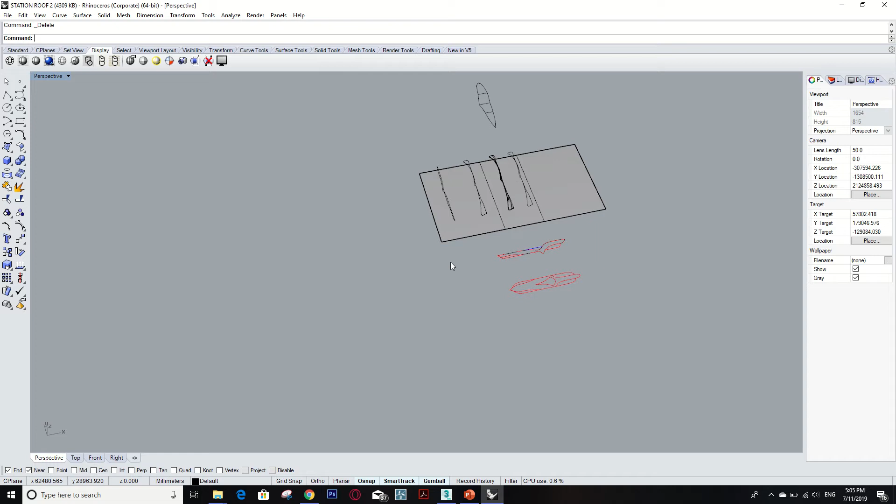Using Rhino to create an organic shape. So first, I have some of my stuff here. So the red line here indicates the shape that I have done on the sketches.

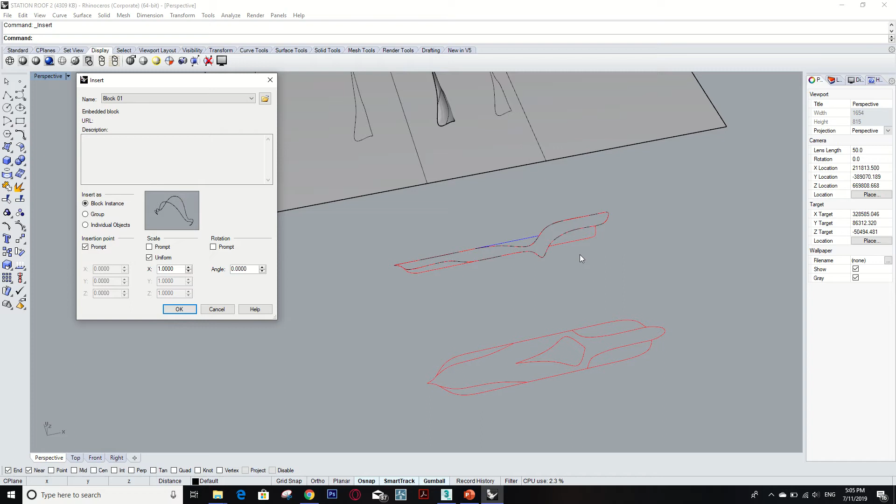So simply you just go to Insert, File, and then Insert, and then just select the photo that you want to put in. Click on the files and then put the photo in, the photo of your sketch of course, and then you can start tracing the line.

So in order to trace this curved line, suppose this is the sketch, so you have to go with the command, just type INTE or something, so it pops up here. I think it's the shortcut for InterpCrv.

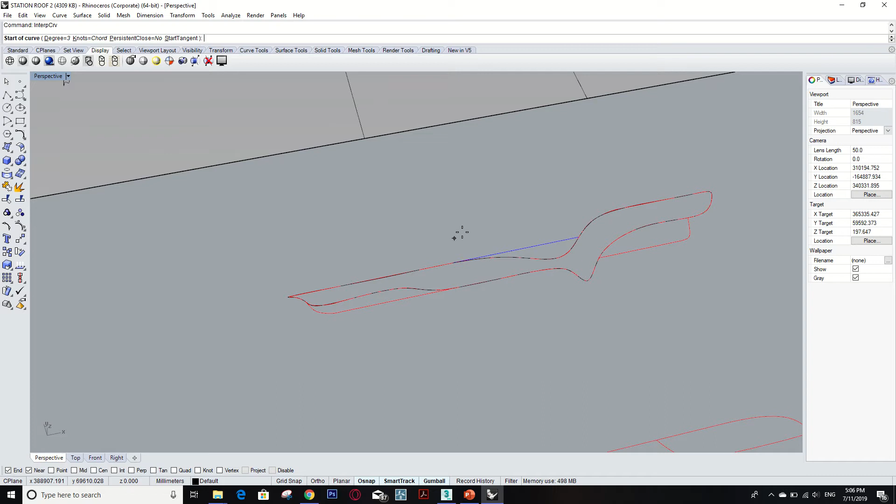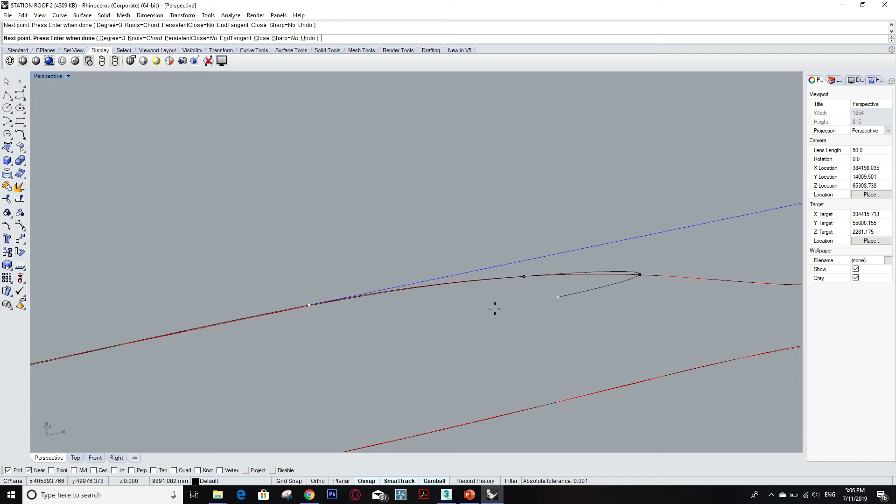So when you have the image right there, make sure that there's a snap nearest here, so you can just click on anywhere that you want. So when you start tracing, for example, this point is here and then it is here.

You just click on any point that you want according to your shape, because it's going to curve following your shape. But make sure that you don't click too close to one another, because there will be too many vertices. Vertex refers to the white point right there, like the dot. So it's going to look like this.

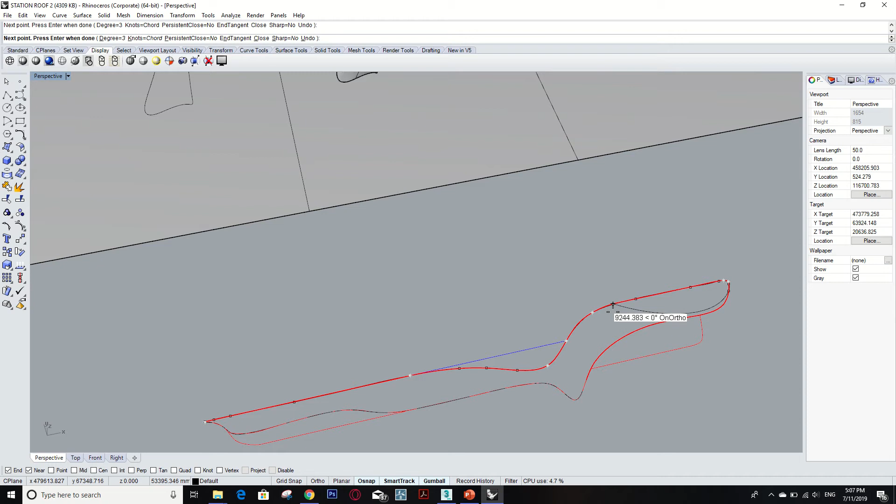Something like that. Since I already have the shape, I'm not going to redo it, but just show you how to join it. Just find the word Join, click on it, and then enter. So that is your shape.

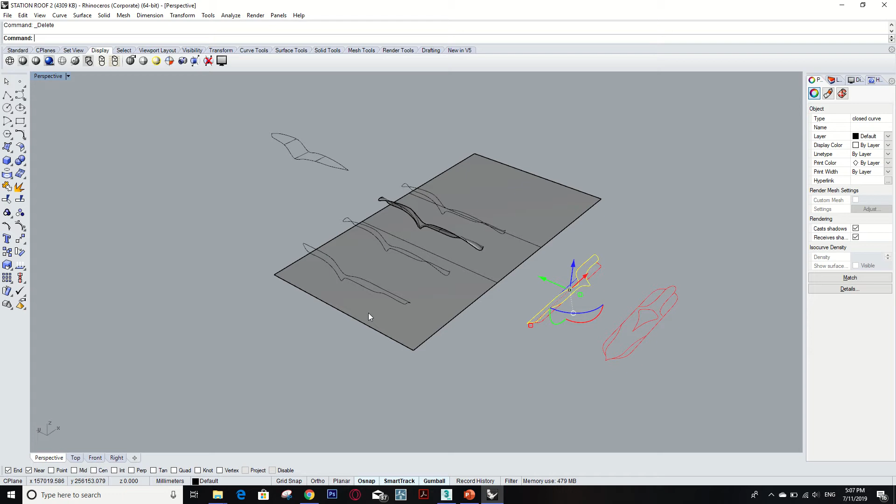So after I have drawn it, it becomes a curve. The selected lines become a curve. So I have moved it vertically, just right here. In order to move it, it's very easy, you can just follow this line. See, you can move it up 90 degrees or something like that. So I already have it just right here.

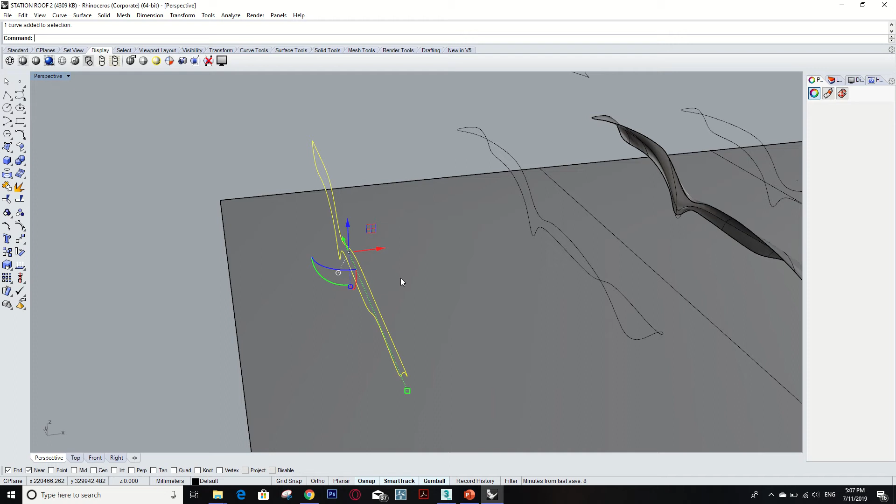But it doesn't have the face yet. So now what we're going to do is create the face following that line. Oh, sorry, before that, this is just a flat one. So what we want to do is make a 3D line like this, as you can see, it's not flat, it has a form like in the real shape.

So in order to do that, you have to select the line, the curve that you have done, and then the command is Edit Point On. It's right there, EDITPTON, edit point on, and then just enter, and you will see the vertices popping up.

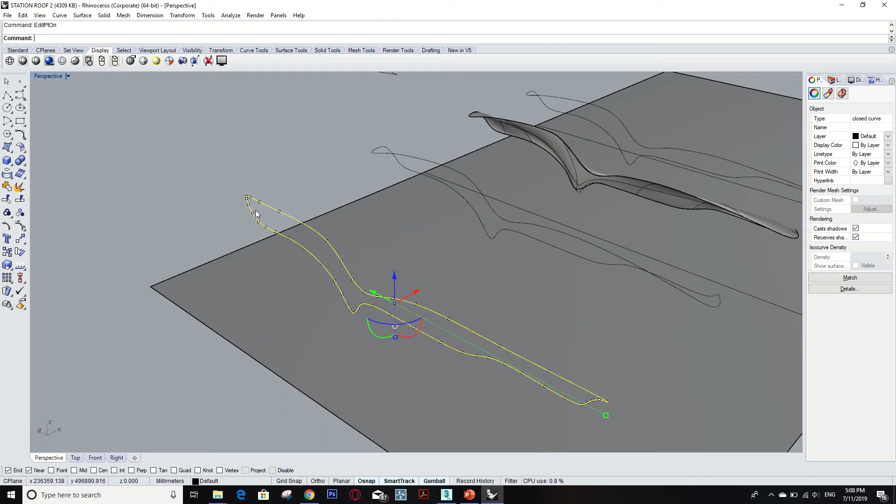So what I simply do is click on each vertex and then move it. Make sure that you move according to axis, like the red axis or the blue axis. You cannot just click on the vertex and move it freely, because it's going to mess up your model. See? It's going to mess up everything.

So what I actually do is move it like this, and then I start moving another point a little bit more, another one a little bit more, until you create the shape that you really want, like the curved one.

So here you can also type the dimension that you want to move. When you hold it, you can see the X, Y, Z statistics here changing according to your move. So it's quite accurate if you know exactly to which point you want to move them.

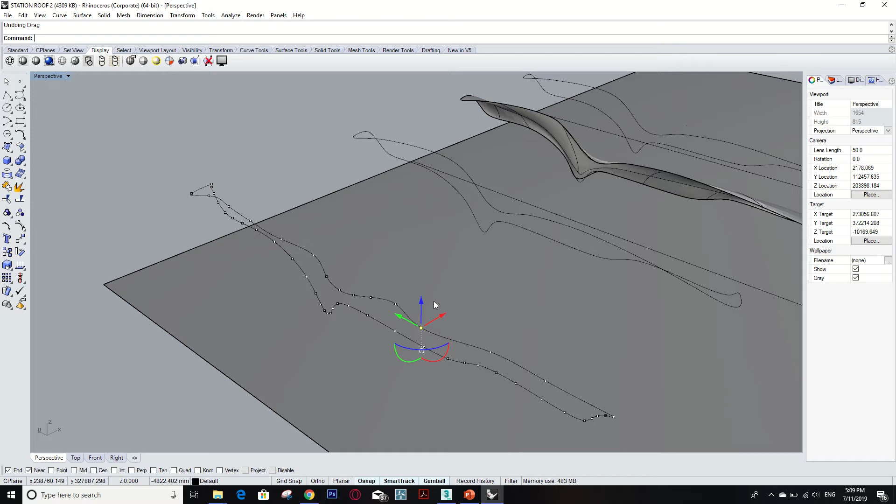So I'm not going to move all of this one by one again, sorry. Just follow what I told you, then you will end up with a shape like this. See, like it. Yeah, so I already have the shape.

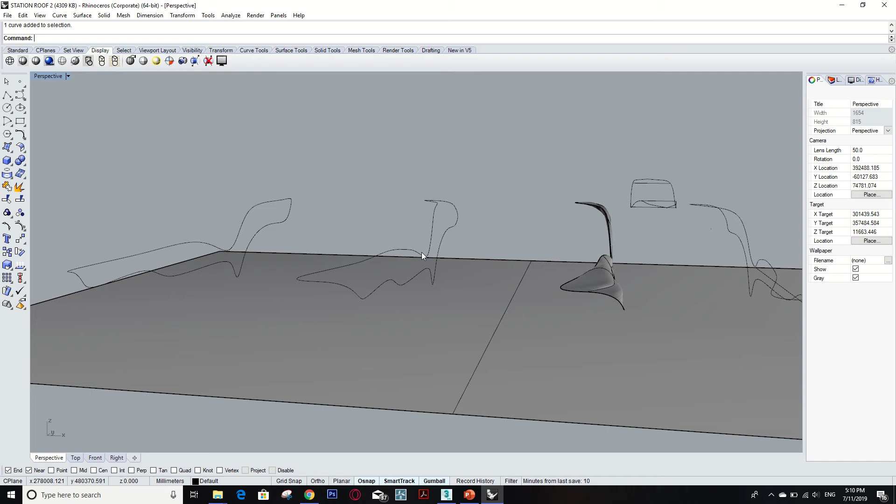So if you click on this one, you can see that the curve is a closed curve, like it's only one object. But if you see this one, it's different lines, separated. Why do we have to separate it?

I'm going to apply the network surface command to create a face like this. But in order to use the network surface, you have to make sure that you have 4 different separate lines. So this is 1, 2, 3, 4.

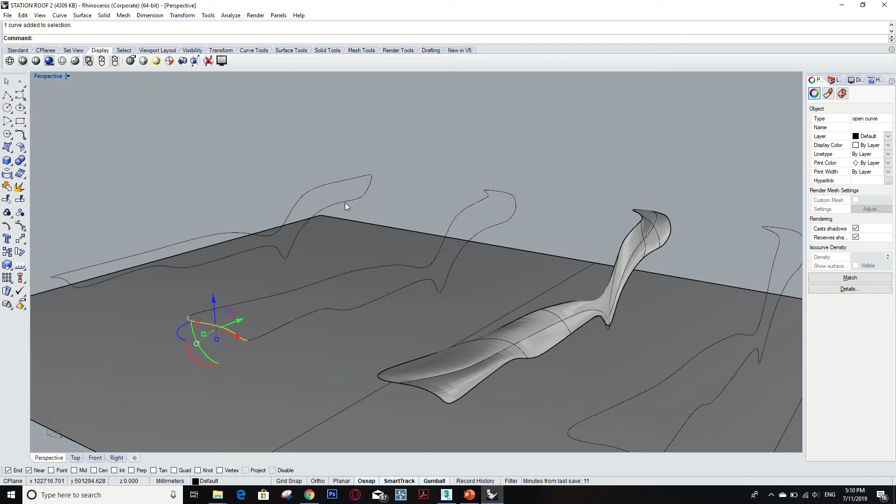You can simply use the command InterpCrv and then draw another line to intersect with it. That's 1, that's 2, that's 3, and that's 4. Then simply use command trim.

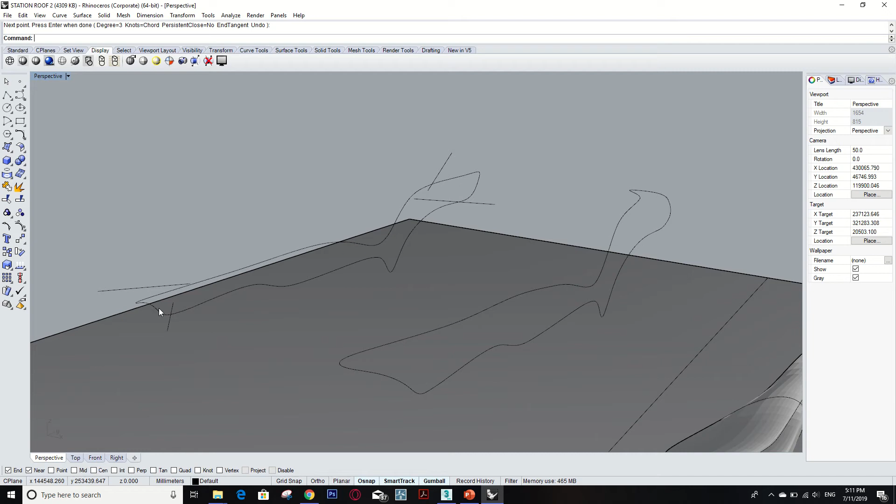But before that, you have to copy the line curve that you've done, too many lines, because after you trim, the area that you trim will lose the line. For example, I'll type in the command trim, select on these 2 reference lines, and then enter.

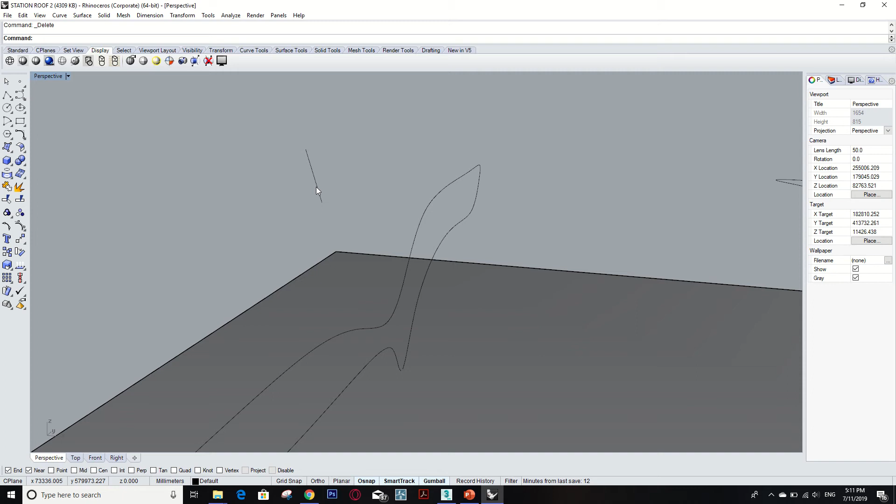I forget that it needs to be snapped on the object. So I'm going to trim it again. Enter, select the reference lines, and then click on that. See, so it's gonna be gone.

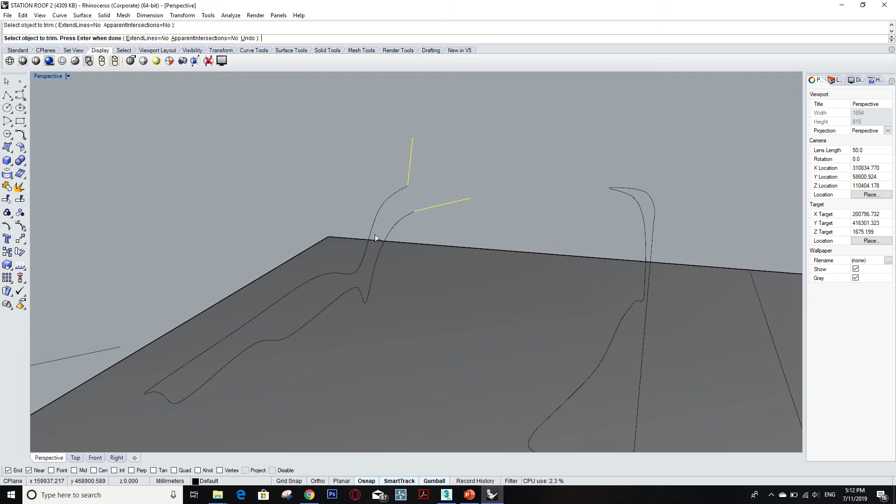So make sure that if you want that line back, you have to copy the model first before you trim. Of course I'm not going to repeat the way I did it from the beginning. So here I already have the different trim lines, 4 of them. You have to make sure you trim it in the direction I tell you, like this one.

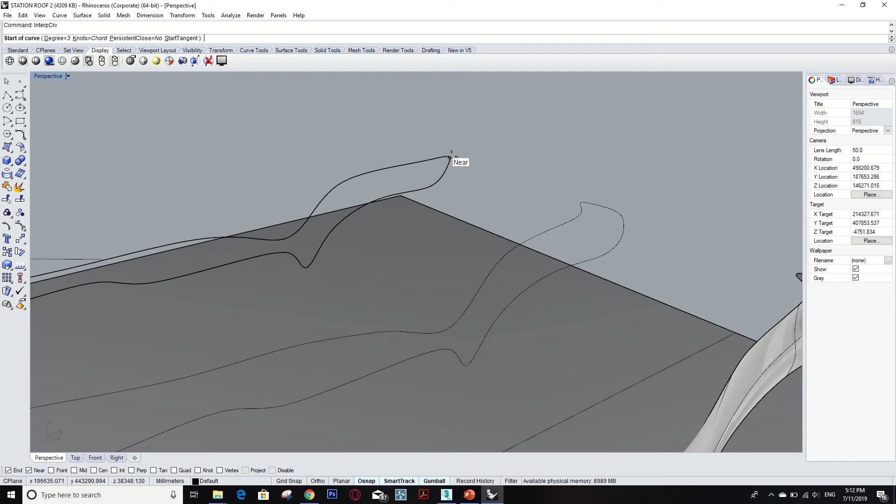I'm just going to draw it again here, and then here, and here. Because you need the line that has been trimmed in a parallel way.

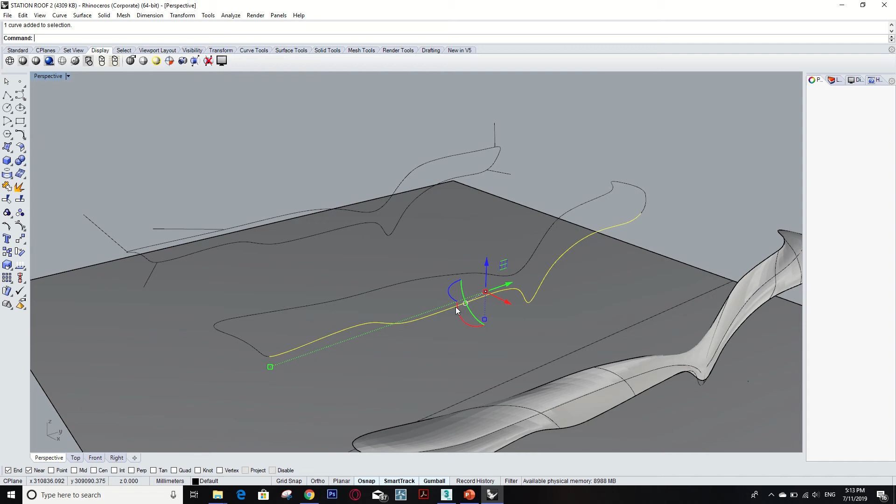For example, this line should be facing this line, and then this lower line, the whole line here, has to be facing up here, like this one. So you can see that this line is facing this line, and this line is facing another line here.

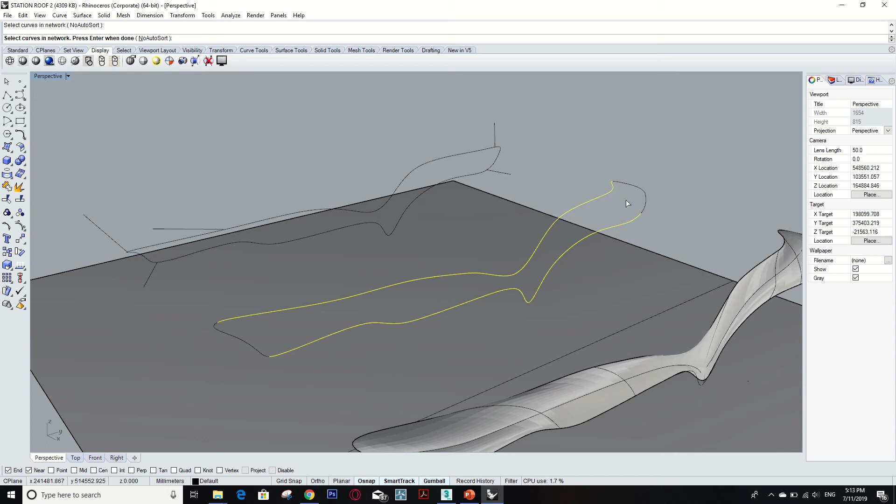Okay, so now we're going to apply network surface. You can just type network surface, it pops up here. Then you have to select the line by holding shift, click another line, and then the line there, and then enter.

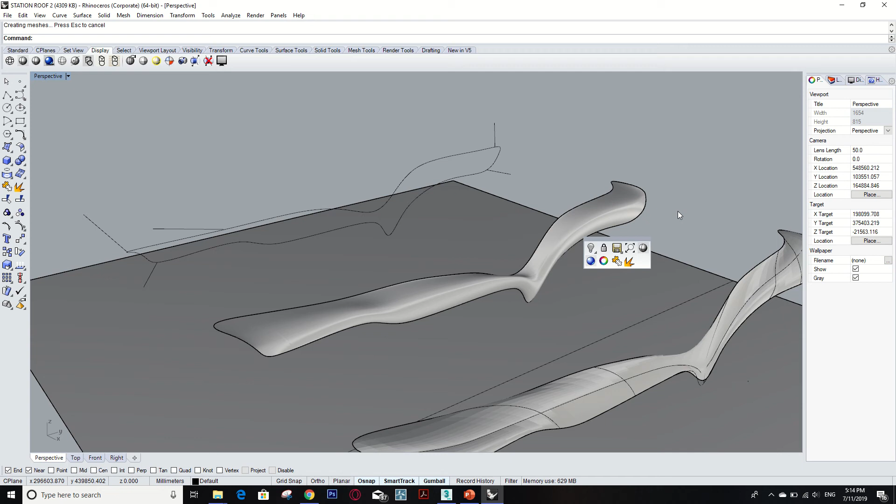So you can see it shows the lines that have to be joined to create the face. Simply click OK and wait for the operation to get done. See, so it's just right there. This is the face that we've created in organic form.

And of course, if you just wanted another side of the form, because this is the shape of my building and it's symmetrical, just use command mirror and then click on that and enter. That's it, it's very easy.

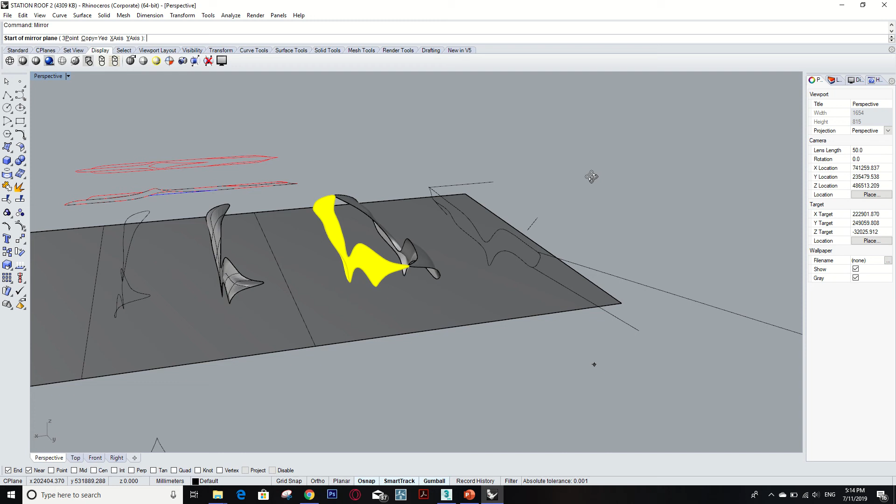I used this in my design research project because I had done it before I learned 3ds Max. So yeah, it's very simple.

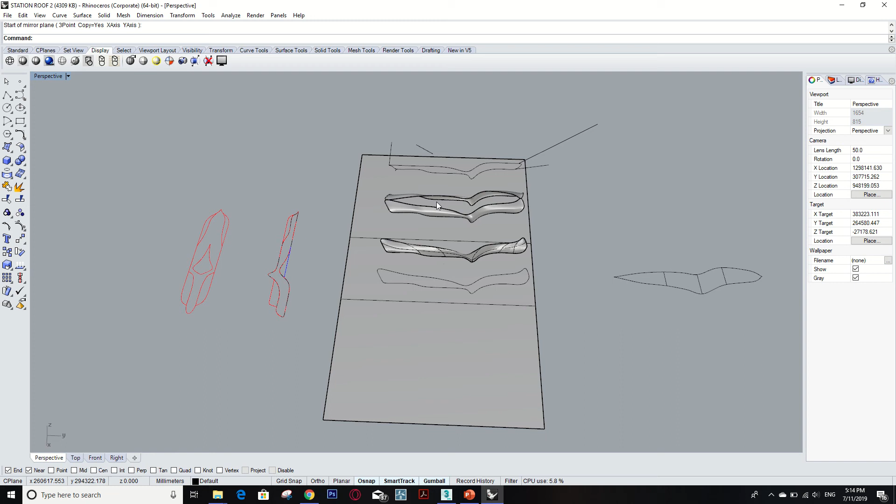Similarly, when I want to create another glass panel covering the roof here, it's exactly here. Last time I used the other method, which is you can just use InterpCrv and then trace the line from there. See, that's how it works.

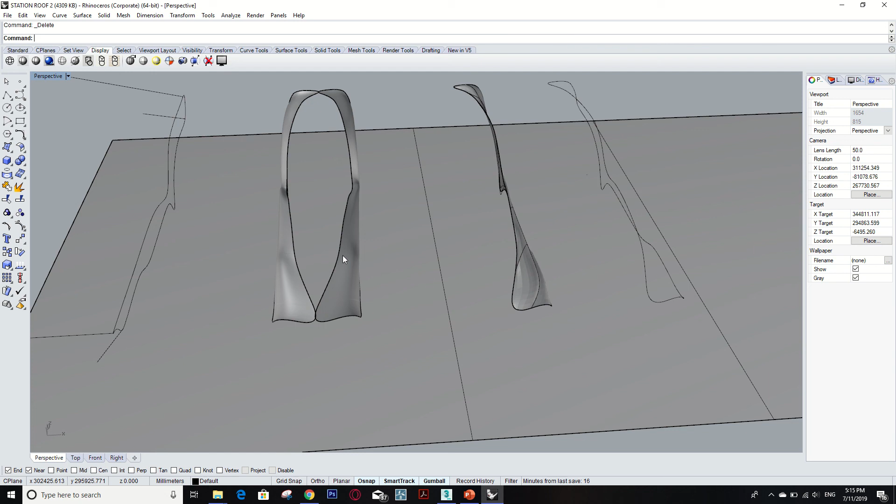But another way is you can simply use command project. When you project it, it's going to be flat on the surface. Let me try that, okay so I'll just remove that. Project. Oh sorry, I have to click on that and then project. Oh, it's not working with the surface, sorry.

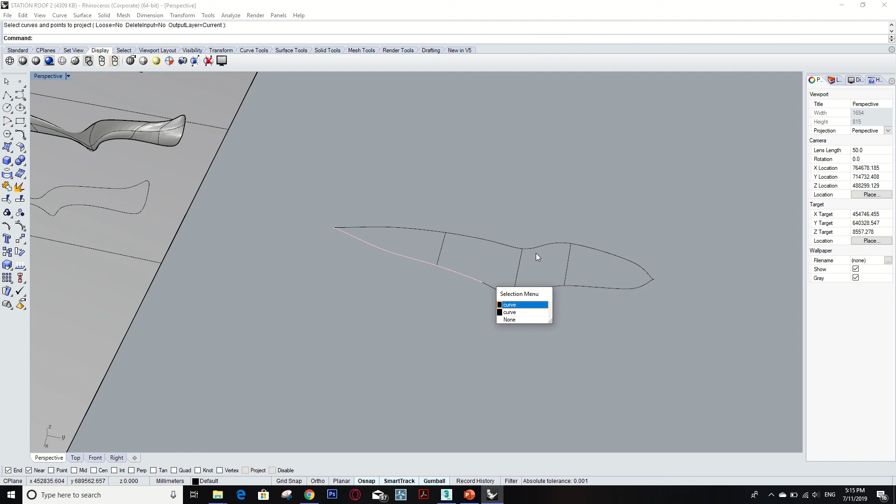Okay, so now we're going to use this one to create another face. So what I drew here is just to make sure that the curve is going correctly according to that line.

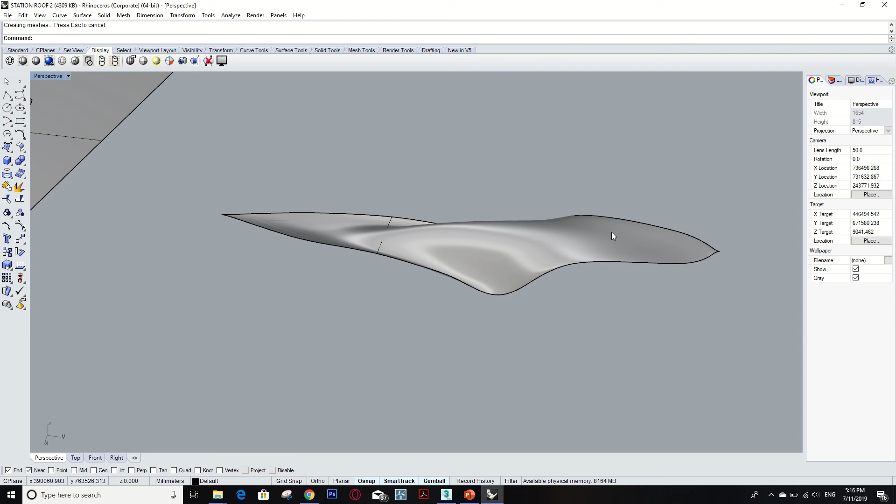So what we're gonna do is use network surface again, click on each line by holding shift, then enter, and wait for the operation to be done. See, so this is how it looks like. Simply, you can create the building shape.